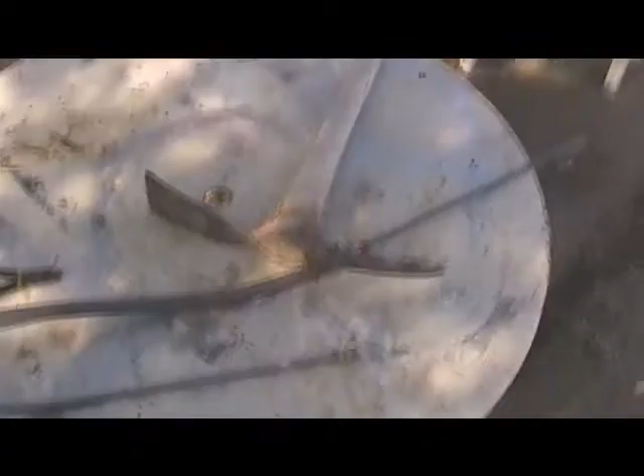Again, the physics are no different than what this hemostat does when it's kinking a blood vessel. So right now I'm going to demonstrate what happens. I got this steel brake line. Simple, silly experiment, it is being mated to a hose by a barb fitting and some clamps. We got this hose that goes to our fluid source, in this case, a regular water faucet. Again, this is just to show the physics behind it, which is what matters.

So I'm turning the flow all the way up, have a good flow of water on the other end. This stick here is nothing more than a paperweight to prevent the momentum from the water knocking that pipe off of the table. So you got a nice few feet of fluid shooting out of the spout. Right here I'm showing a combination German pliers, and what's important here is the cutting edge there, which we'll use to put a kink in that line.

So, I struggle with this one because it's not the right size. I would have used my larger pliers, but I couldn't find them. And once they got slippery here, it was hard to get a grip, it was hard to press on them. But a larger pair of pliers, as I found out, created a perfect seal later on.

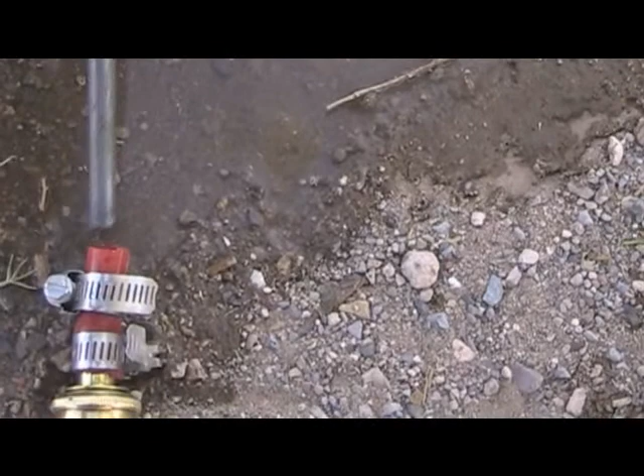Here I'm going to show you what the results of that was. You see 2 or 3 kinks on that line, which create the seal. And the problem I had was that there was such a pressure spike from the seal preventing that flow that it just popped out. It slid off of the plastic hose there because it's a good seal.

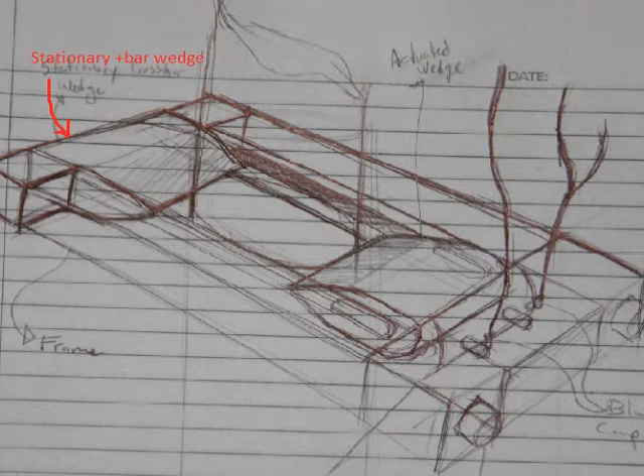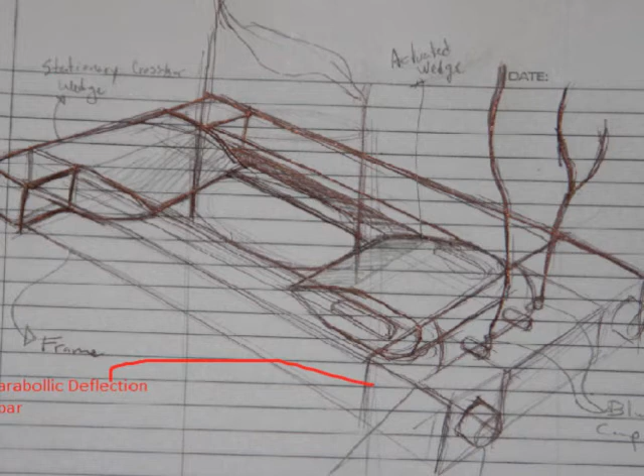So this is the device that I propose. It's gone through a few revisions, so it doesn't look like this anymore, but the concept is that you have 2 wedges surrounding the pipe, here pointing in red, lightly drawn. We got a stationary crossbar wedge that creates a support for the structure and also a mating surface for the other wedge. You got a parabolic deflection crossbar, similar to the opposite end, but this one is parabolic. And what I mean by that is that you got this U-groove section that mates onto the other wedge, and that's important, and you'll see why.

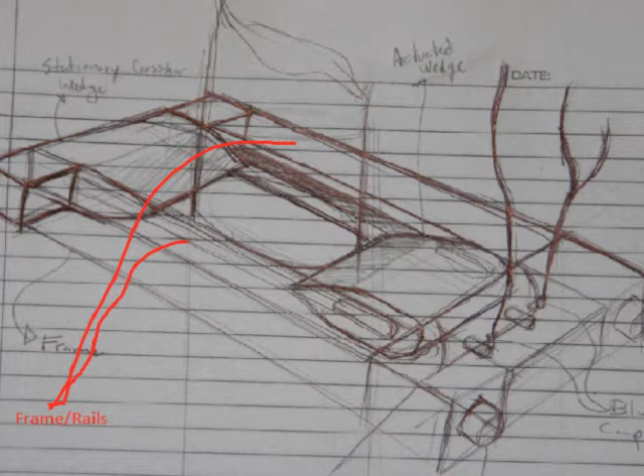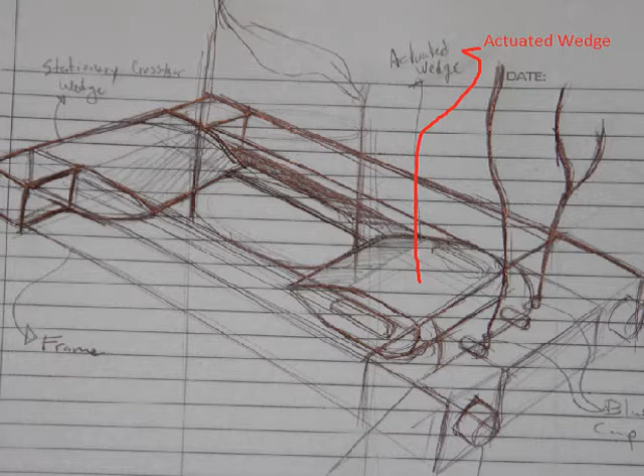So we got this combination frame rails that hold the structure together, prevent it from tearing apart, and we got these bolts or studs on either end of the device. Again, to keep it from tearing apart. And here's the heart of the device, the actuated wedge. It moves in one direction, slides side to side, and it has these integral rail guides, which have changed already in the design stages. This is just as a proof of concept. What these do is they ride on the grooves of the frame to prevent it from moving in any other direction.

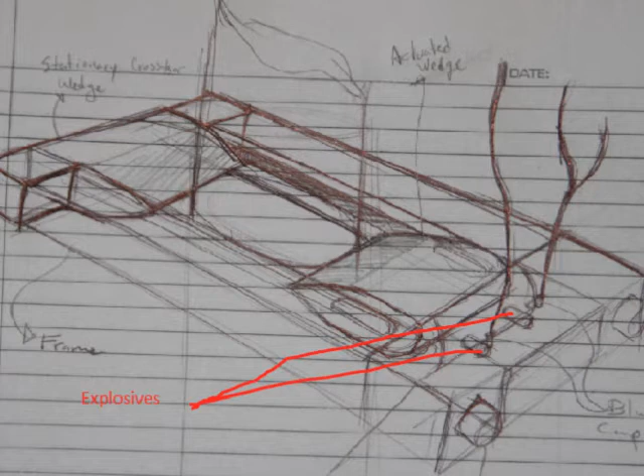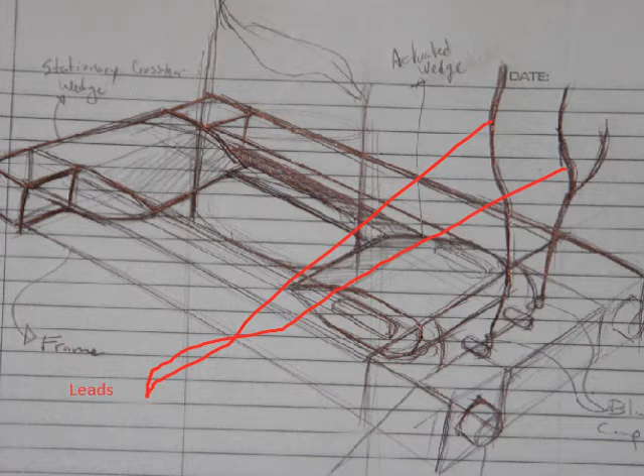So here's what's going on. We got explosives that actuate the wedge, the actuated wedge. Explosives are better in this situation than, say, hydraulics, pneumatics, or electric activation. They're fast and they create the force necessary to move that wedge and to create that necking that we need. And you got these mile-long leads that are easy to source, much easier than pressure pipes that would run for miles. And that's all you need. I mean, you need a signal to detonate those explosives.

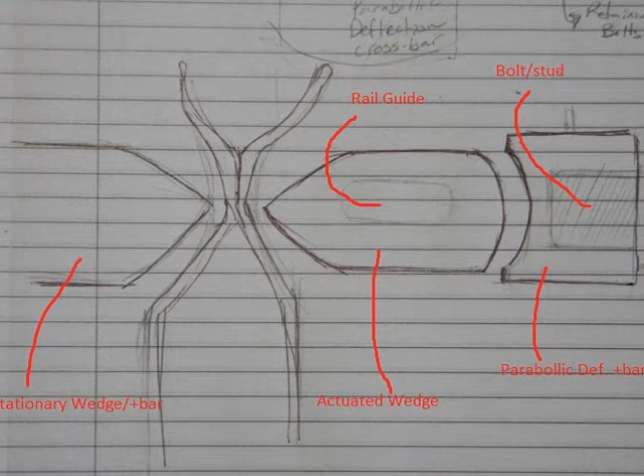And here's a cross-section of the device. You got both wedges on either side. You got the parabolic deflection crossbar. You got the bolt stud there that holds everything in place, the rail guides, and you got the necking action that this device creates. What's great about the necking action is that you got a weldable cavity at the top that you can use either submarine welding, or if I were to do it, I'd choose a waterproof container full of thermite that you could remotely ignite, and that would give you both the filler and the exothermic reaction needed to weld that shut.

Again, the device is very simple. I mean, I don't see a group of dedicated and competent tool builders taking more than a week to build a device. And what's great about it is that you can install it in existing rigs to prevent any disasters like this from happening again. I mean, you can have one at the top where the rig is, one in the middle, and one at the bottom of the sea, so that wherever that rupture occurs, you can have a fail-safe to prevent any leaks.

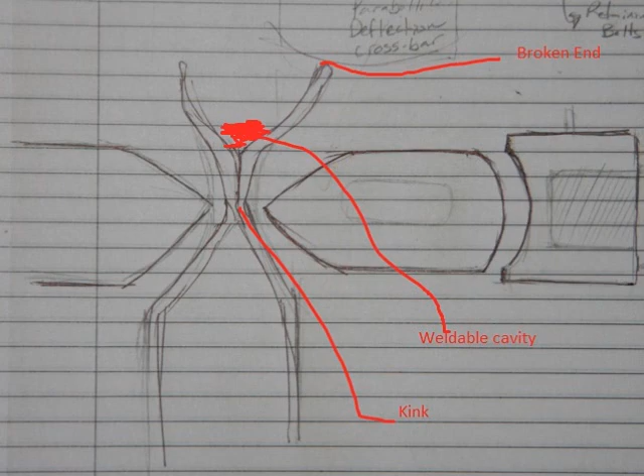Again, my name is Hiram, and this is the device that I propose, which would quickly and efficiently take care of this problem. Thank you for watching.